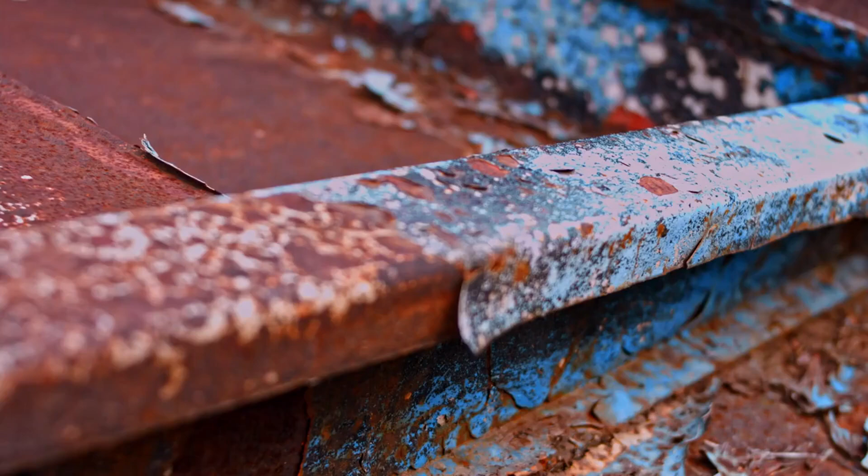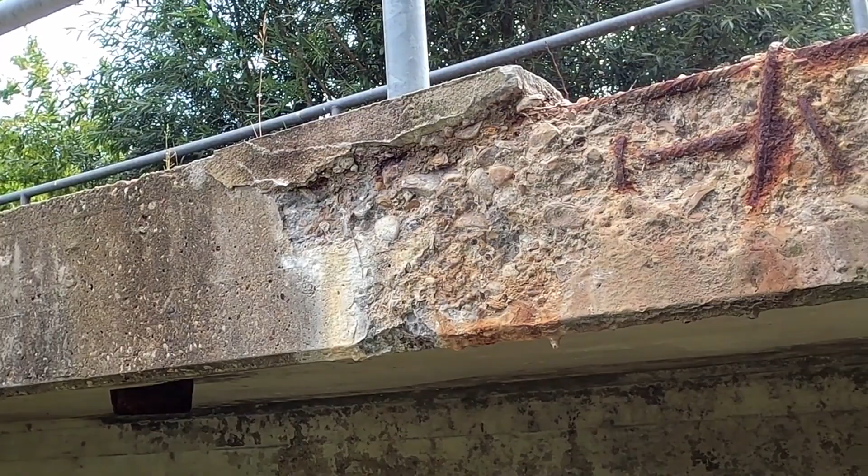Corrosion does not explode. It does not make noise. It does not cause instant failure. And yet it destroys infrastructure worth trillions every year, weakening bridges, pipelines, ships, vehicles, and industrial systems from the inside.

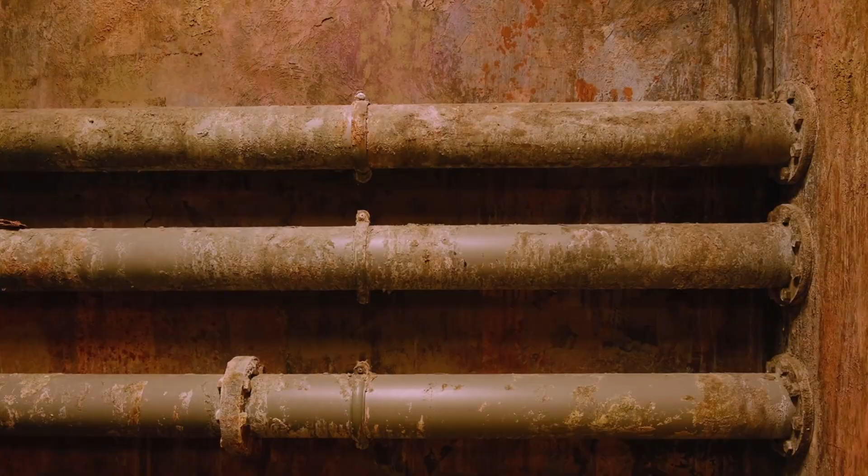Corrosion is one of the most destructive processes in engineering, not because it is violent, but because it is quiet, constant, and unavoidable. Most people associate corrosion with rust, the familiar reddish-brown layer on steel. But rust is only a visible symptom, not the real cause. Corrosion is not a cosmetic issue. It is a fundamental electrochemical process in which metal slowly breaks down at the atomic level. Once it starts, it cannot be turned off. It can only be slowed, redirected, or controlled.

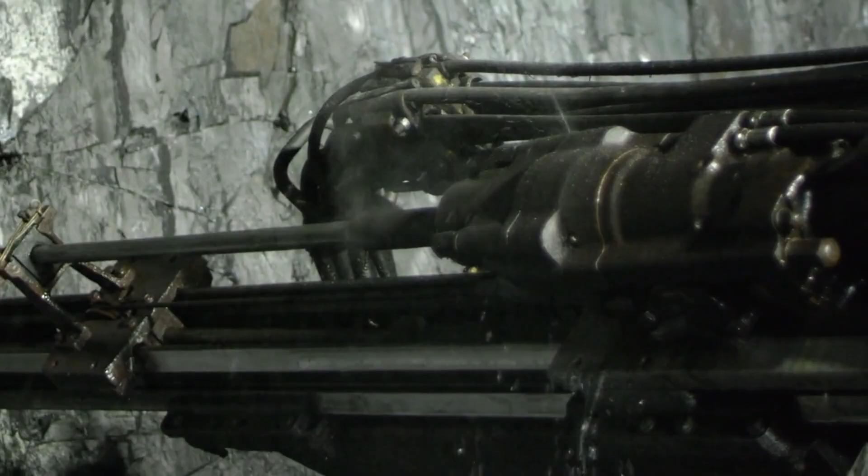The key idea to understand from the beginning is this: metals are not naturally stable in their refined form. Iron, aluminum, and copper originally existed in nature as ores, mostly oxides or sulfides. Extracting pure metal required enormous amounts of energy. Corrosion is simply the metal's tendency to return to a lower energy, more stable chemical state.

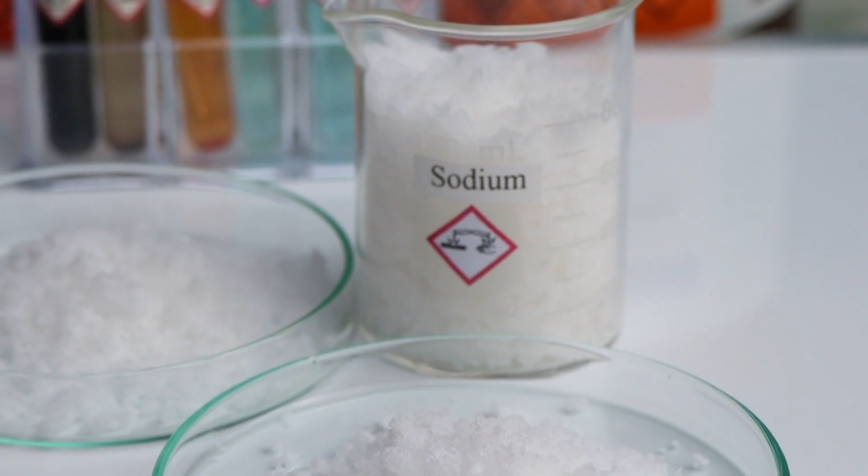In other words, metal wants to corrode. Not because it is defective, but because physics and chemistry favor that outcome. The moment metal is exposed to an environment that allows this process, corrosion begins automatically.

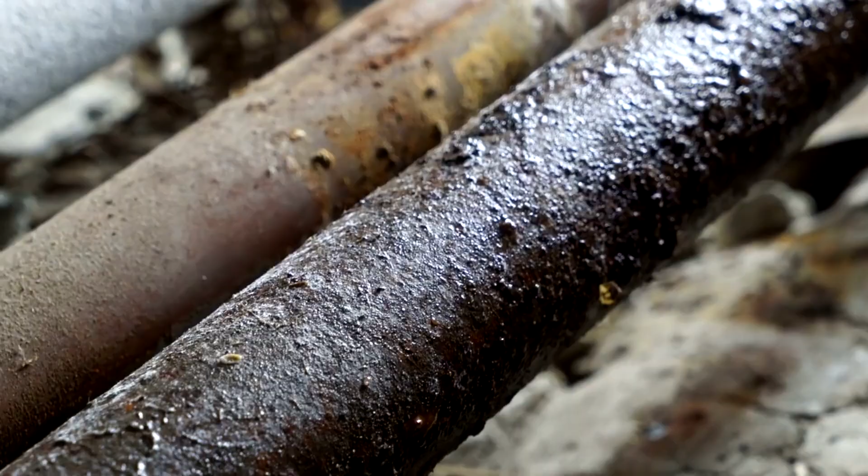Corrosion does not require immersion in water. Humidity from the air, oxygen, and a small number of ions are enough. That is why cars corrode in garages, structures degrade indoors, and metal components fail even in seemingly dry environments. Extreme conditions are not necessary. Ordinary surroundings are sufficient. The true engine of corrosion is electrochemistry.

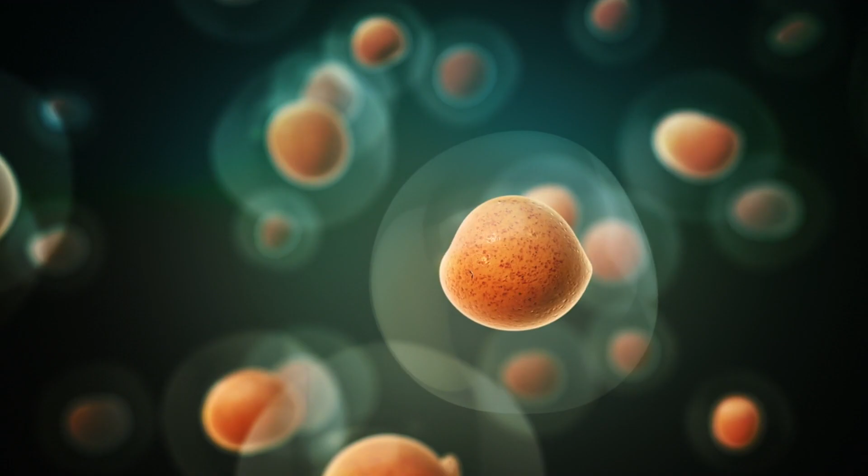On a metal surface, microscopic regions form that behave like tiny electrical cells. In one area, oxidation occurs. In another, reduction takes place. Electrons move, ions migrate, and metal atoms slowly leave the solid structure. The process is so subtle that it remains invisible until the damage becomes serious.

This is what makes corrosion so dangerous. It does not destroy materials all at once. It weakens them internally, often in places that cannot be seen. By the time corrosion becomes visible on the surface, structural integrity may already be compromised.

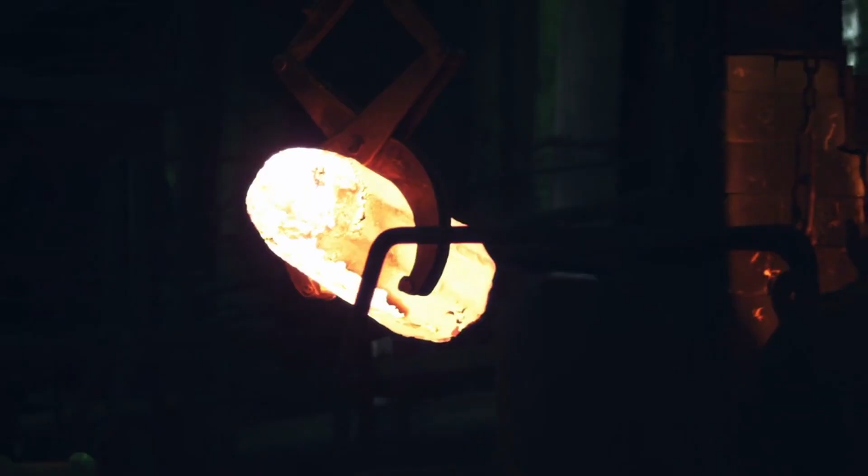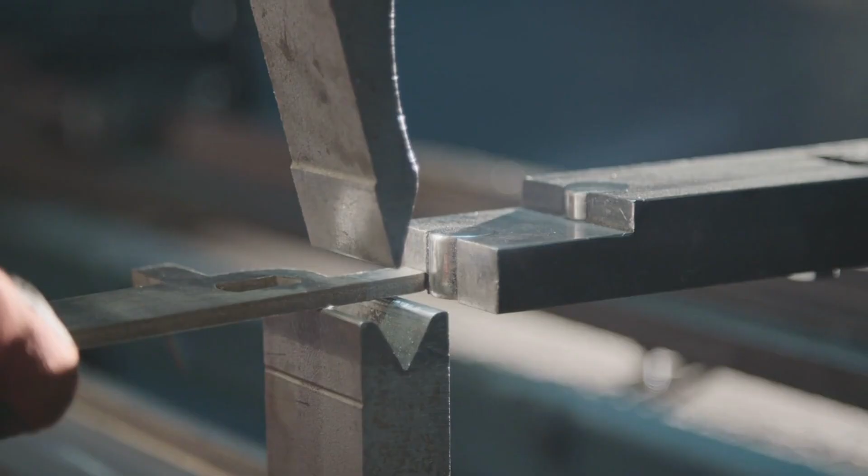In this video, we will explain without simplification how corrosion truly forms, what happens at the atomic level, why water, oxygen, and salts matter, why some metals corrode faster than others, and why rust is not the same as corrosion. Once you understand the mechanism, you will never look at metal structures the same way again.

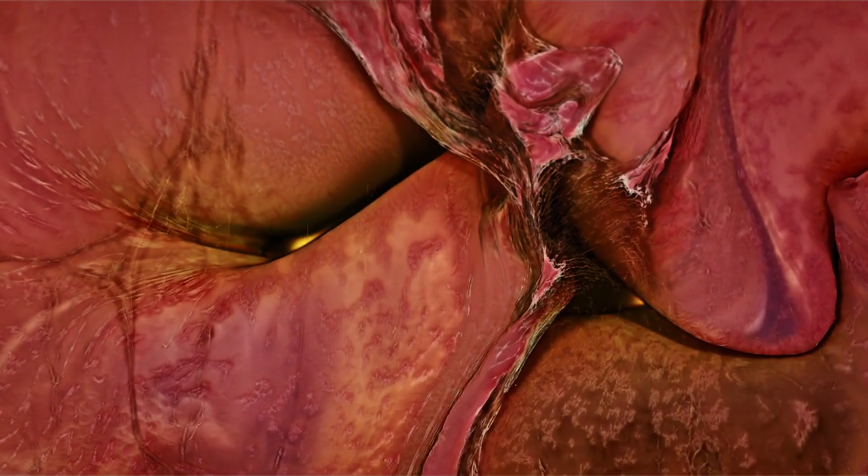When we zoom in on metal at the microscopic level, the idea of a perfectly uniform, solid surface quickly disappears. In reality, every metal contains tiny imperfections, impurities, grain boundaries, internal stresses, and structural variations. These differences are invisible to the naked eye, but they are more than enough to trigger corrosion.

The moment metal comes into contact with moisture and oxygen, its surface begins to act as an electrochemical system. Certain areas become anodes, while others turn into cathodes. Between these regions, electrons start to flow. Without wires, without external power, the metal effectively becomes its own microscopic battery.

At the anodic sites, oxidation occurs. Metal atoms lose electrons and dissolve into the surrounding environment as positively charged ions. This is the critical moment where real damage happens. Material is physically removed from the structure. The metal is no longer solid at that location. It has been transformed into ions.

At the cathodic sites, the electrons released at the anode are consumed. Most commonly, they participate in reactions involving oxygen and water, forming hydroxide ions. Together, these anodic and cathodic reactions create a closed electrochemical loop. As long as this loop exists, corrosion continues.

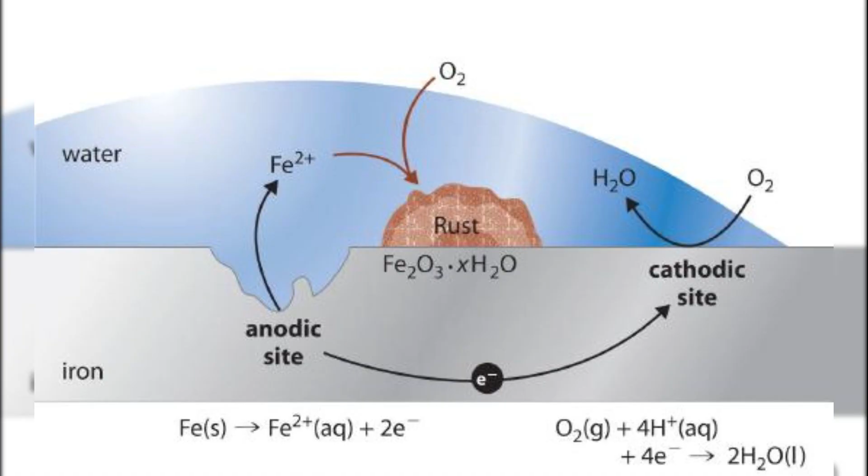What makes this process especially dangerous is that no external energy source is required. Everything needed for corrosion is already present: potential differences within the metal, oxygen from the environment, and a thin layer of moisture acting as an electrolyte. Once the circuit is closed, corrosion becomes self-sustaining.

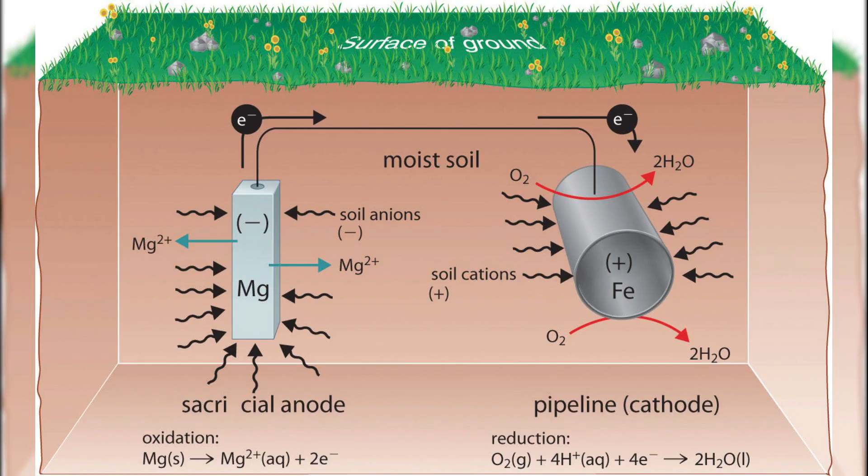Water plays a much more important role than simply being wet. It acts as an electrolyte, allowing ions to move between anodic and cathodic regions. The more conductive this electrolyte is, the faster corrosion proceeds. That is why dissolved salts dramatically accelerate corrosion. Seawater, road salt, and industrial atmospheres create extremely aggressive conditions for metals.

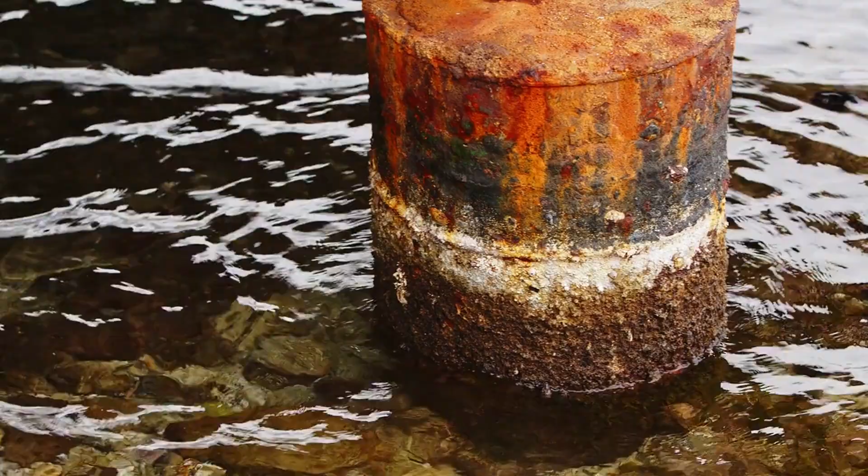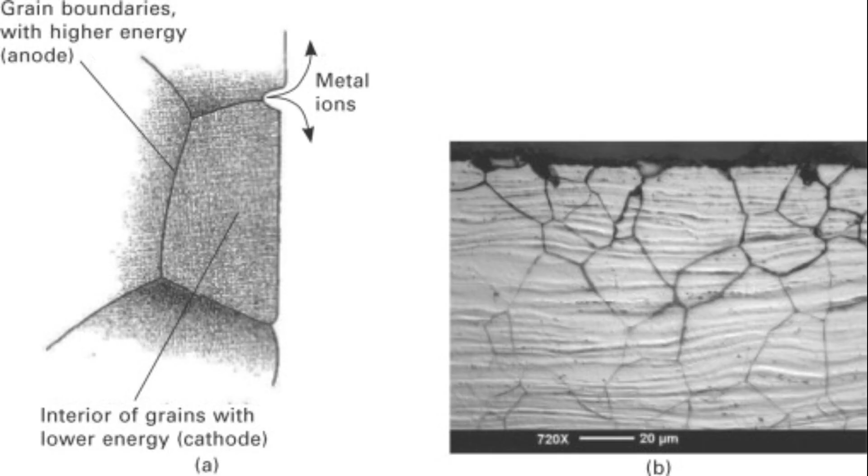Another crucial aspect is that corrosion never starts evenly. A tiny scratch, a weld, residual stress, a compositional difference, or contact with another metal can create a local anodic region. Once this happens, corrosion concentrates in that area. While electrons travel through the entire metal component, the actual material loss becomes highly localized.

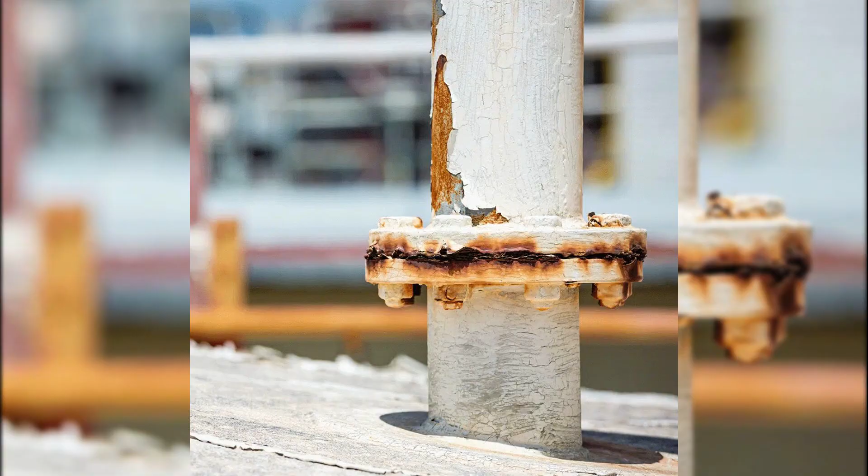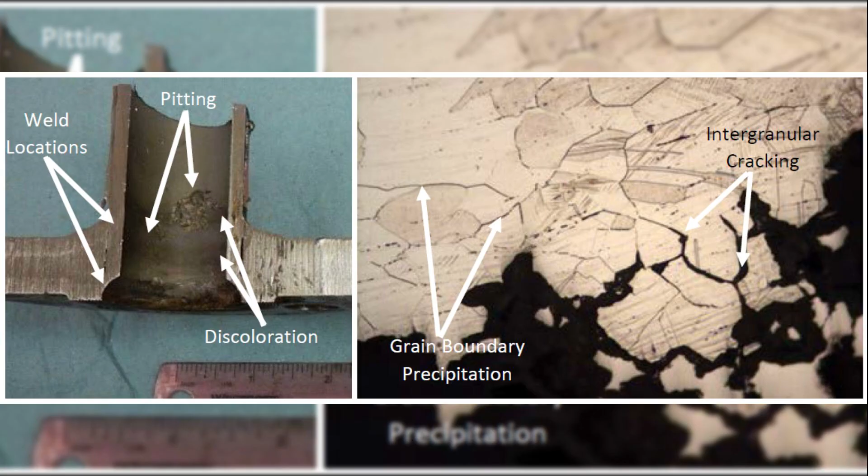This is why corrosion is so deceptive. From the outside, a component may appear strong and intact. Internally, however, its structure may already be seriously compromised. Small anodic regions can remove large amounts of material, while the rest of the surface remains relatively unaffected.

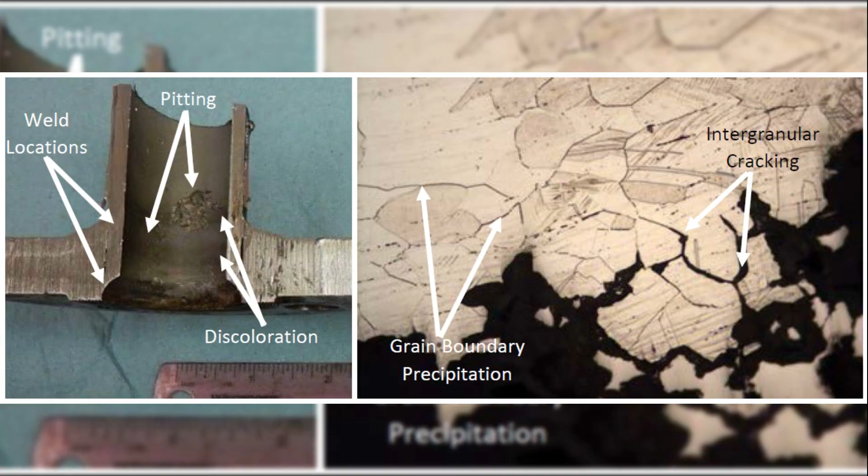The electrochemical mechanism of corrosion applies to nearly all metals. The differences lie in reaction speed and corrosion products, not in the underlying principle. Iron forms rust, aluminum forms a thin oxide layer, copper develops a patina, but in every case, electrons flow, ions migrate, and metal seeks a lower energy state.

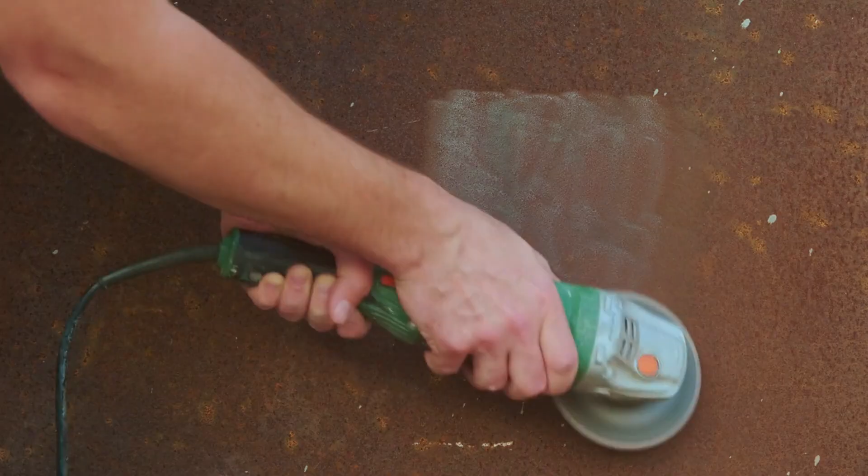This also explains why corrosion is so difficult to stop. Removing rust alone does nothing. To truly control corrosion, the electrochemical circuit must be interrupted by isolating the metal from the electrolyte, altering electrical potentials, or forcing reactions to occur elsewhere.

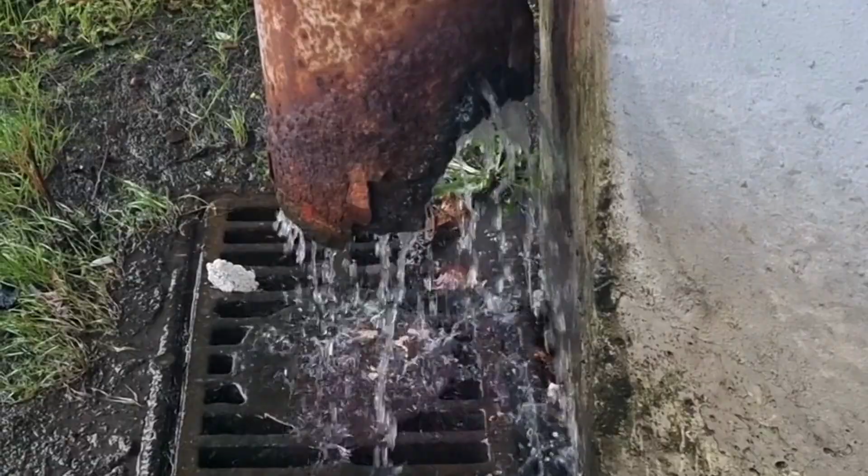Once the electrochemical nature of corrosion is understood, a critical realization follows. Corrosion is not a single process with a single outcome. It appears in multiple forms, and the most dangerous ones are often the least visible. Rust spreading evenly across a surface is usually not the real threat.

The real danger lies in corrosion that attacks selectively, locally, and silently. The simplest form is uniform corrosion. Here, material loss occurs relatively evenly over the entire exposed surface. Thickness gradually decreases, strength is slowly reduced, and the damage is generally predictable. From an engineering perspective, this is the least dangerous type because it can be anticipated, measured, and accounted for in design. Regular inspections usually reveal the problem early.

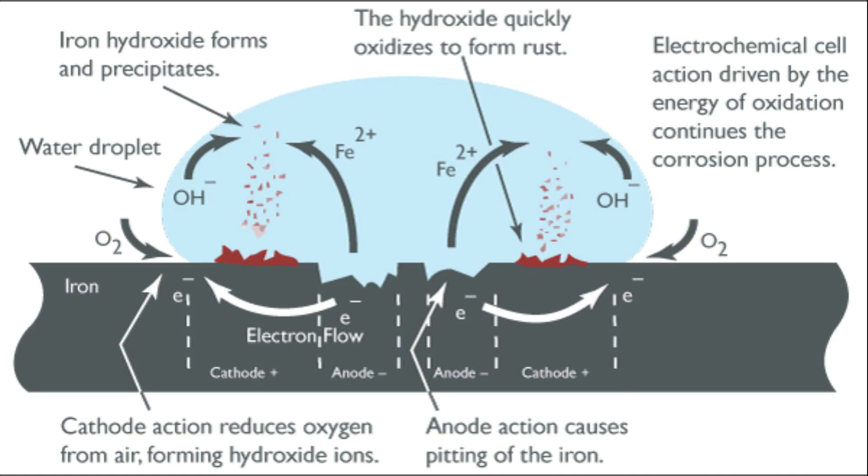The real risk begins with localized corrosion, especially pitting corrosion. In this case, the surface may look almost untouched, while tiny pits form at specific locations. These pits act as highly active anodic sites. Corrosion proceeds rapidly downward rather than outward, drilling deep into the metal. A pipe, tank, or structural element can fail suddenly, even though 99% of its surface appears intact.

Closely related is crevice corrosion. This form develops in narrow gaps, under gaskets, bolts, lap joints, washers, or overlapping plates. Inside these crevices, oxygen becomes depleted, while ion concentration increases. This creates a strong electrochemical imbalance between the crevice interior and the surrounding surface. The result is intense, highly localized corrosion that remains hidden until structural damage is severe.

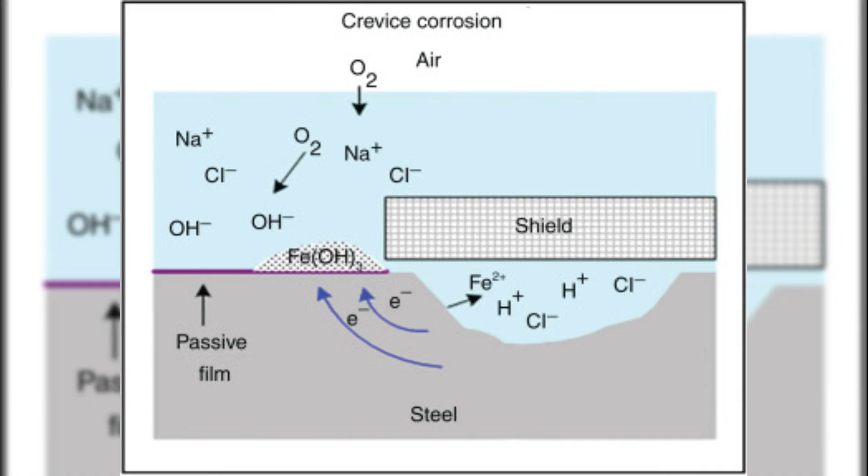Another major threat is galvanic corrosion. This occurs when two different metals are electrically connected and exposed to an electrolyte. Together, they form a galvanic cell. The less noble metal becomes the anode and corrodes much faster than it would on its own. The more noble metal is protected at the expense of the other. Poor material selection, such as directly joining steel and aluminum without insulation, can turn an otherwise solid design into a corrosion failure waiting to happen.

One of the most dangerous forms is stress corrosion cracking. Here, corrosion interacts with mechanical stress. Even relatively low tensile stress, combined with a specific corrosive environment, can initiate microscopic cracks. These cracks propagate rapidly, often without visible plastic deformation. Components can fracture suddenly and catastrophically, with no clear warning signs.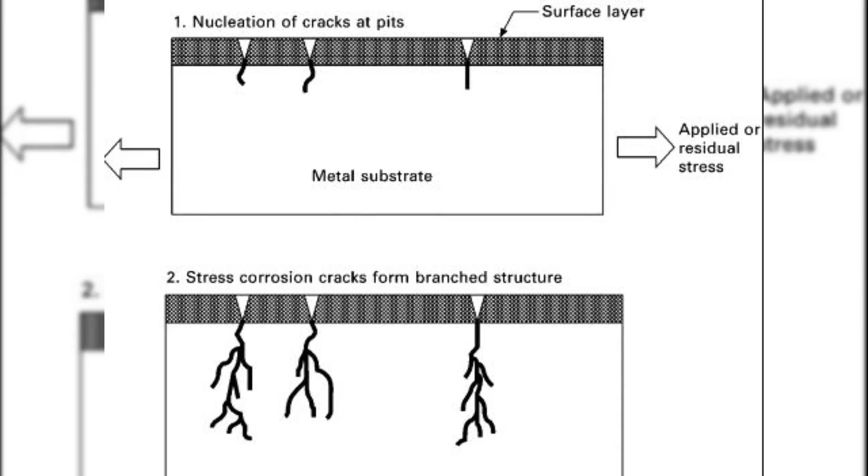There is also intergranular corrosion, which attacks the boundaries between grains in a metal's microstructure. From the outside, the metal may look normal. Internally, however, cohesion between grains is destroyed. The material loses strength and toughness, becoming brittle and unreliable. This type of corrosion is often linked to improper heat treatment or alloy composition.

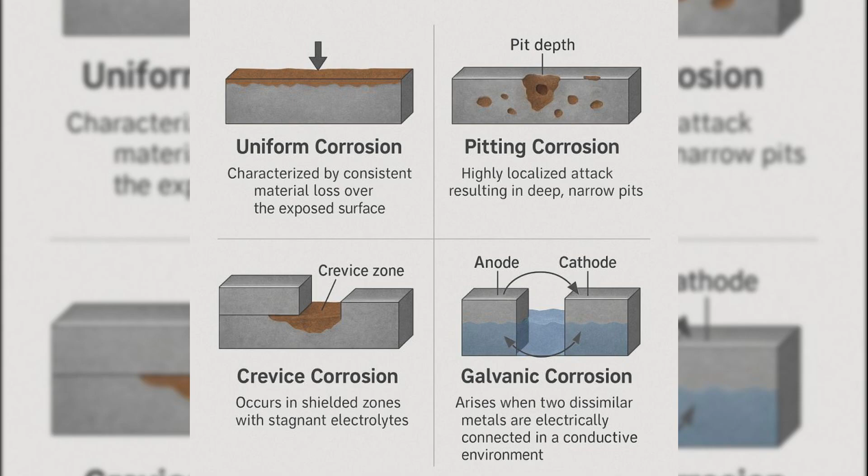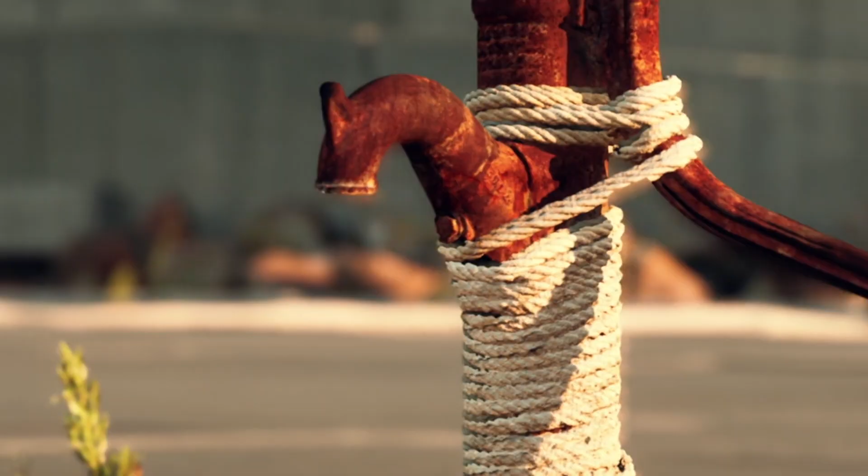What all these forms have in common is selectivity. Corrosion always seeks the weakest point, whether it is a geometric feature, a metallurgical defect, a chemical imbalance, or a design flaw. It does not spread randomly. Once a vulnerable area is found, corrosion focuses there with maximum intensity. This is why corrosion is such a serious engineering challenge. It can remain undetected for years, quietly progressing beneath the surface until a structure fails suddenly and without obvious cause. Many catastrophic failures are later traced back to small, localized corrosion mechanisms that went unnoticed.

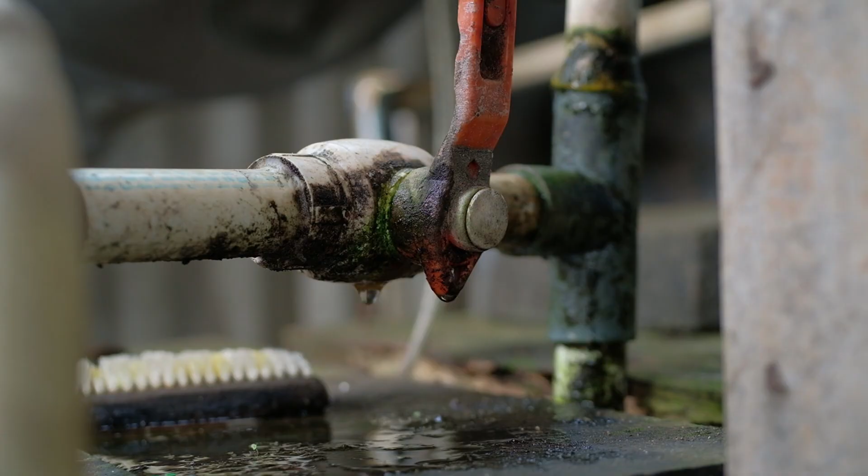At this stage, one question becomes unavoidable: if corrosion is natural, electrochemical, and unavoidable, how can it be controlled at all? Once corrosion is understood as a natural electrochemical process driving metal toward a lower energy state, one conclusion becomes unavoidable. Corrosion cannot be completely eliminated. It can only be slowed, controlled, or redirected. All corrosion protection strategies are essentially attempts to break or interfere with the electrochemical circuit that enables corrosion.

The most straightforward approach is to isolate metal from its environment. If contact with water, oxygen, or an electrolyte is prevented, corrosion slows dramatically. This is why protective coatings are widely used. Paints, varnishes, enamels, and polymer layers act as physical barriers. Their weakness is durability. Even microscopic damage can create ideal conditions for localized corrosion, sometimes accelerating degradation beneath the coating.

More effective in many cases are metallic coatings, particularly zinc coatings on steel. Zinc is less noble than iron, meaning it preferentially oxidizes. In this system, zinc sacrifices itself to protect the steel underneath. Even if the coating is scratched, zinc continues to corrode instead of iron, providing protection as long as zinc remains.

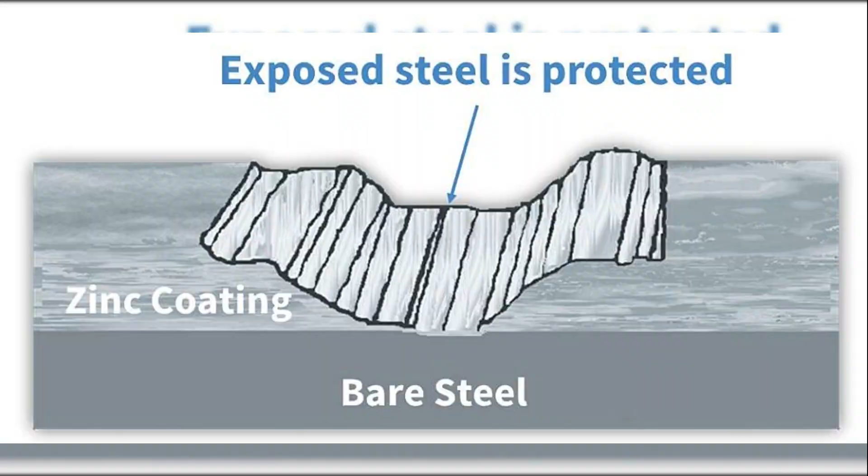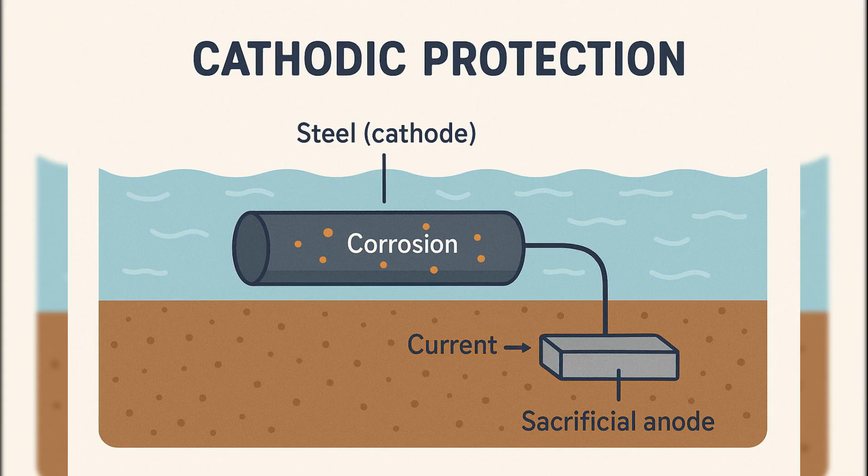This principle is also used in sacrificial anode systems. These anodes are intentionally attached to ships, pipelines, storage tanks, bridges, and offshore structures. Made from metals that corrode more easily, sacrificial anodes become the preferred anodic sites. The protected structure becomes the cathode and remains intact. Once the anode is consumed, it must be replaced. Protection is always temporary, never permanent.

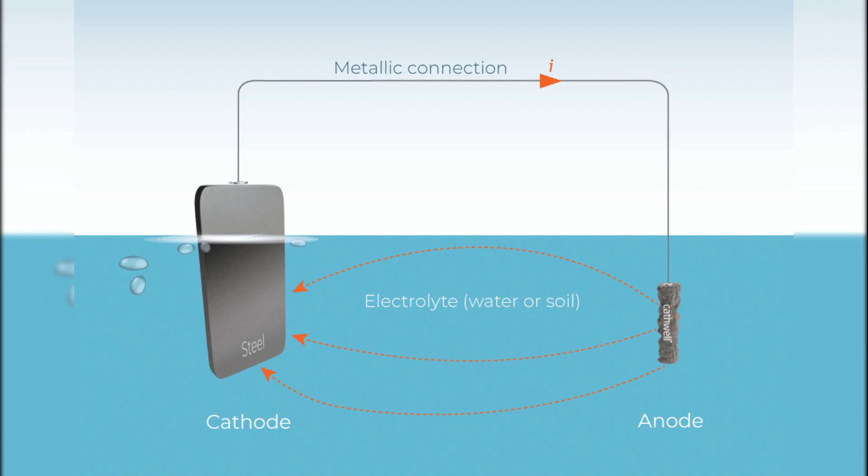A more advanced solution is impressed current cathodic protection. In this method, an external power source forces the protected metal to remain cathodic. Anodic reactions are effectively suppressed. This technique is highly effective and widely used for large-scale infrastructure, but it requires continuous monitoring, precise control, and a constant energy supply. Another important mechanism is passivation.

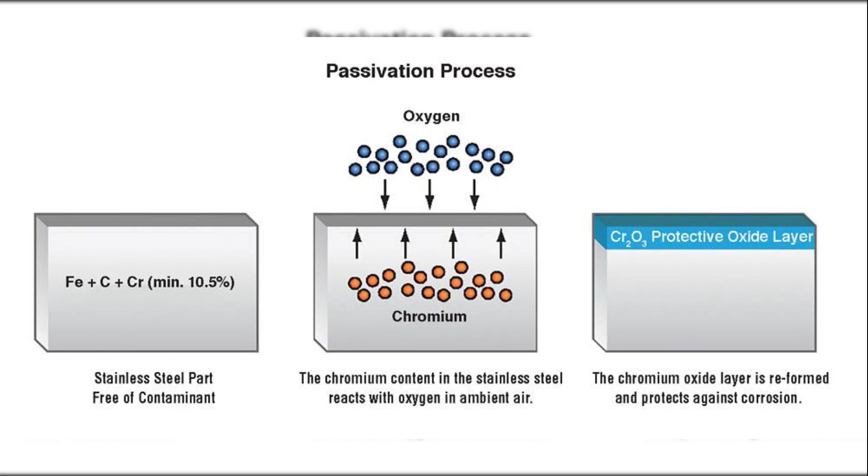Some metals, such as aluminum and stainless steel, naturally form extremely thin but stable oxide layers on their surfaces. These layers isolate the metal from the environment and significantly slow corrosion. However, in aggressive conditions or when the passive layer is locally damaged, corrosion can restart, often rapidly and in a highly localized form. Design plays a crucial role as well.

Sharp corners, crevices, water-trapping geometries, and direct contact between dissimilar metals all promote corrosion. Good engineering design can dramatically extend service life even without advanced coatings. Poor design can defeat even the best protective systems.

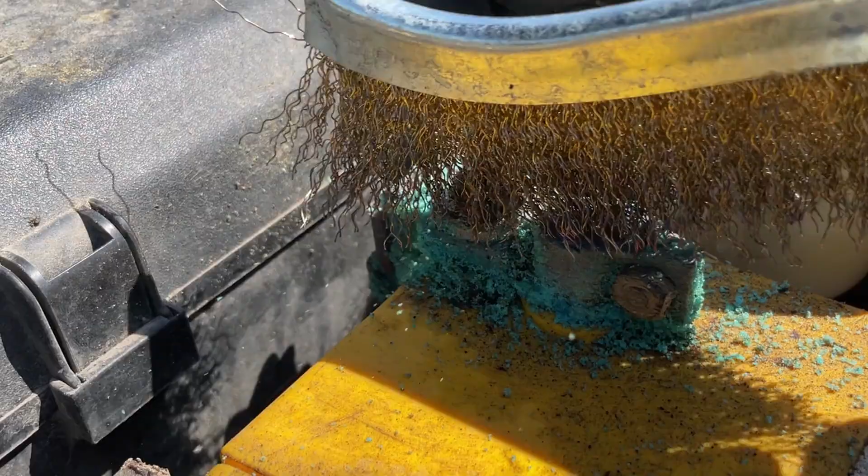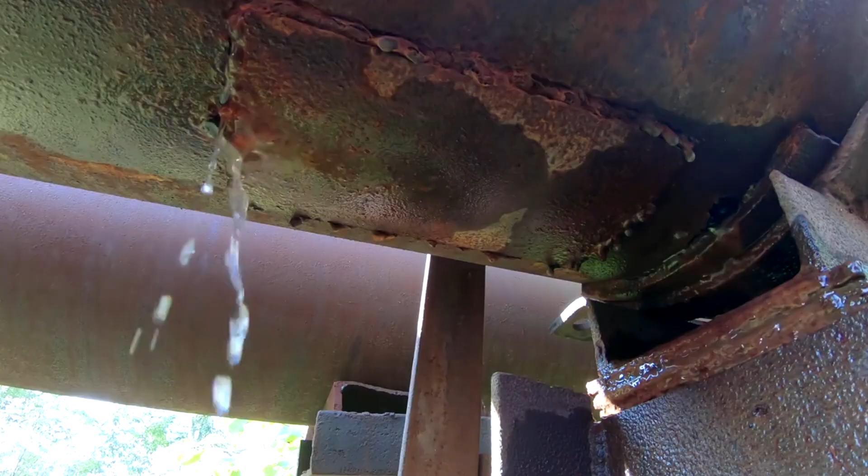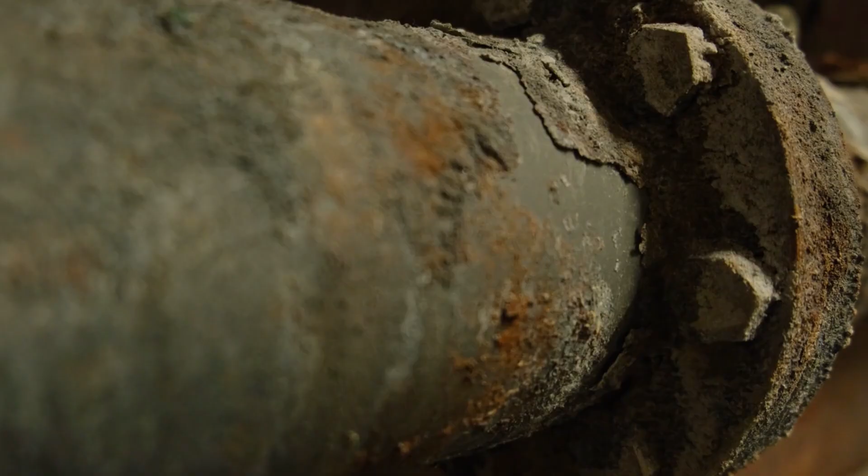Ultimately, corrosion is not just a material problem. It is the result of chemistry, physics, environment, and human decisions interacting over time. Metals do not corrode because they are flawed. They corrode because conditions allow them to return to a more stable state. Corrosion is silent, persistent, and unavoidable. It cannot be defeated, but it can be understood. And understanding corrosion is the difference between a structure that lasts 10 years and one that lasts a century.

Rust is only the final symptom. Real corrosion begins much earlier, at the atomic level.